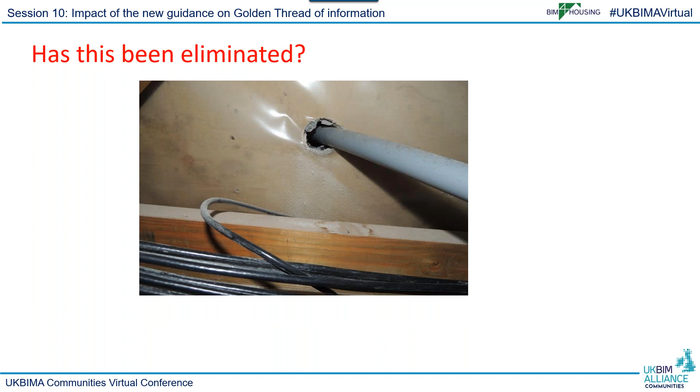And what we're now doing is producing safety case reviews to identify where those risks are. And yet, even if we've done fully coordinated models, we're still getting this sort of quality of workmanship that is undermining things. And even the new clerk of works, when they're appointed, can only pick up on things they can actually see. So one of the challenges, I think, is what Dame Judith was talking about.

A digital record, transforming things into digital rather than analog things that we can see and pick up through normal senses. And really, as far as housing associations are concerned, they've typically left the BIM side of things to the supply chain, but now they are involved.

And they're looking to help them reduce their risk from a legal perspective. So what has been happening is there's a whole range of different processes and methods by which risk can be identified and, probably more importantly, transferred.

And we've also got ways of looking at where the risks are in terms of information, and putting in place processes to identify what those steps are that can be taken to change things. And also the reports that are needed to ensure that we can actually occupy the building afterwards.

But really, what we're trying to do is improve that quality of information. And what Judith was talking about was using BIM to get us to a situation where we've got the same sort of traceability that we've got in aerospace and automotive.

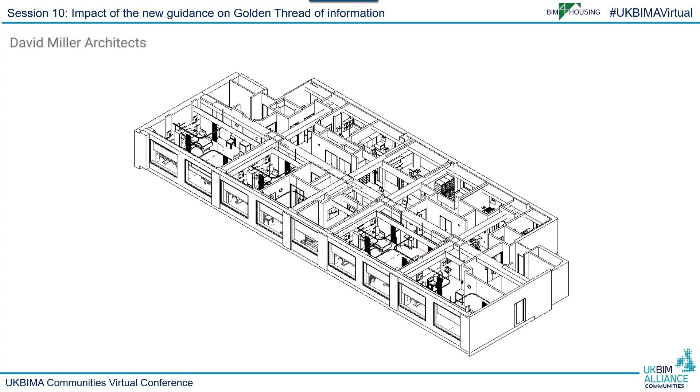So we've been working with David Miller over the last 3 or 4 years to try and look at how we can pull this golden thread process together. And here we've got a specification. This has come from NBS Create. And you'll see here, they're not using fire rating as a reference, they're using fire integrity and fire insulation. I'm sure that there are architects and engineers on this call who would explain to me what the differences are with that, but it's not simple.

And the other interesting thing with that is, although they've referenced 30 minutes there, they've now been advised that it's probably more sensible to take that 30 minutes out of the specification and just leave the reference to the British Standard. And therefore, the person that's trying to find out what the fire rating is of that door has to look at the fire strategy report and also the British Standard. So that may not be a good thing to do when you're in the middle of trying to sort something out in an emergency.

So we think it's better if we can explicitly say what information we need, and that's really what the asset information requirements are about. If we can explicitly say it, then we can automatically validate and check to see if that information has been provided. We can provide product manufacturers with that information as well, so they can ensure that they're providing the data that's needed. And then as it's coming into the project model, we can then automatically generate it through into the digital O&M. It's a matter of using standardization to achieve a lot of that.

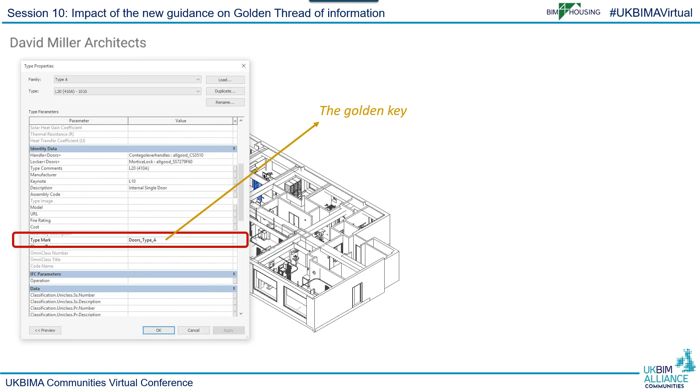So in this case, we've got a Revit model, and we've dropped into the Revit model a parameter. We're calling this the golden key. So this is the golden key to the golden thread. Basically, it's just a reference which then can go out to a schedule. And having that schedule, it means that we can generate, here's a COBie data set, and here we can then see that reference back to the object and also the product that is satisfying it.

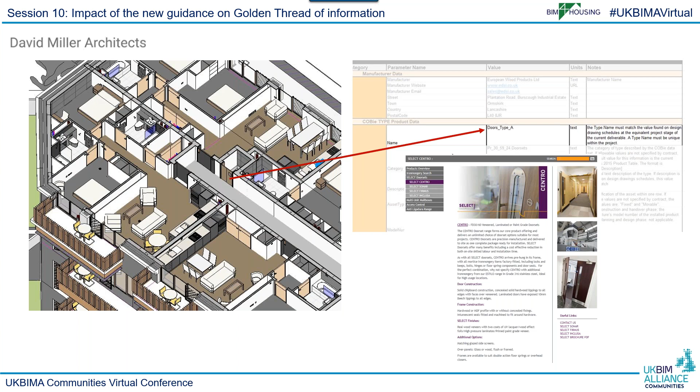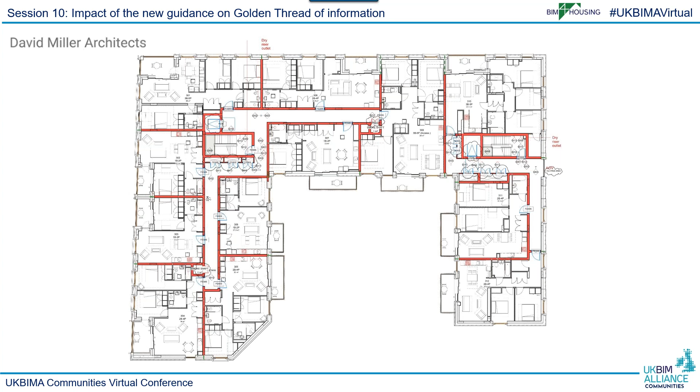By neutralizing that, not putting the manufacturer's information into the model, when that product might get swapped because of an issue during the warranty period or in due course during the life of the job, it can get swapped as well. You can then also reference it back to the fire strategy. So when type A becomes a type G because it's a fire door, or a type F because it's a mechanically controlled door, you're not having to change things in the model. You're simply referencing it to the right type of product.

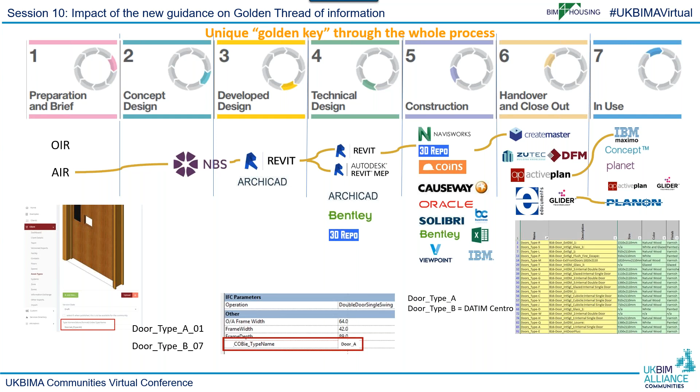And the manufacturer's information can then be kept up to date by the manufacturer. But we're not saying that that should be as a document. It might be as a document, but we need the key data to be held digitally. So the overall impact of that is that we've got the AIR going into the specification tool, connected to the objects in the models, and importantly, we're trying to tie this into procurement. So we're bringing procurement into the BIM process so that we can automatically capture the information as it's needed. And then we can grow that information through the overall process.

Also change management. So if we start at the beginning by tying the requirement to a product that can satisfy that requirement, we then feed that into the design process, and we can then feed that into procurement and the technical submittal process. And that then can go into delivery, installation and commissioning. So it's tying it in and adding value to the way the subcontractors need to work.

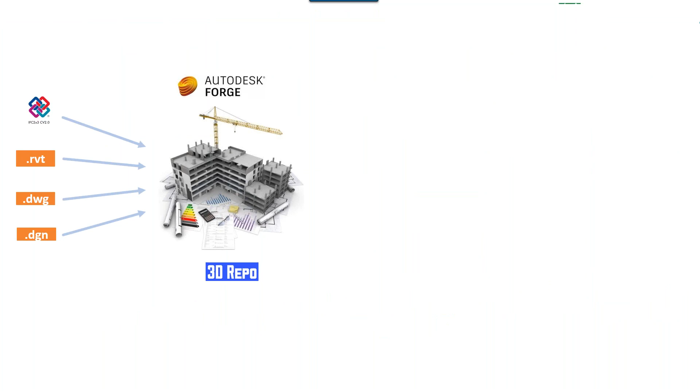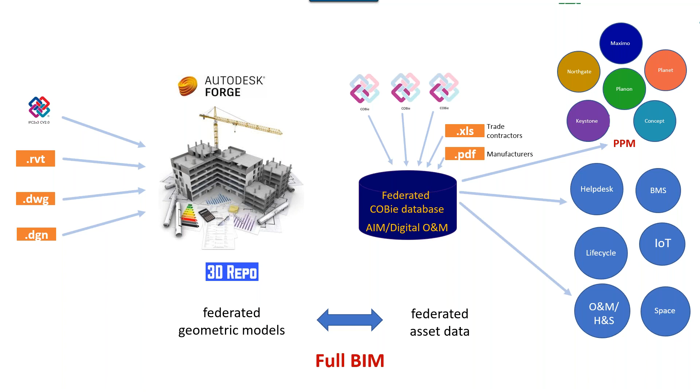So what we're doing really is doing the same with the data that we've been doing for years with the geometry. We're bringing together the data files into a federated database, and also providing trade contractors with simple tools to update their information as it becomes available. So we end up with a federated asset data set that automatically ties to the model. And therefore, once we've got all of that coordinated with the geometry and also the locations of items, we can then feed that out into whichever planned and preventative maintenance system is being used. But we can also have APIs into the various other data sets that are being used as well. So the idea is to create a complete network of data services.

So where are we now? Well, part of the issue really is to make sure that we've got standardized libraries and standardized data sets. And there's a lot of work going on by authorities to author the information so that we're all working and singing off the same hymn sheets.

So as far as the clients are concerned, what we're doing is providing a means by which they can hold that information in standard data templates and library items which they can either have as private or community libraries, which then are used on projects. So when they're then used on projects, they'll get glued together and can supply the information out to whichever systems are being used.

And how do we then capture that information? Well, if that's been specified, we can then feed that out into spreadsheets or online forms into a database so that the trade contractors know exactly what information they've got to provide. These are IFC configured data templates. So that information can then be captured in a form that makes it easy for them to work with.

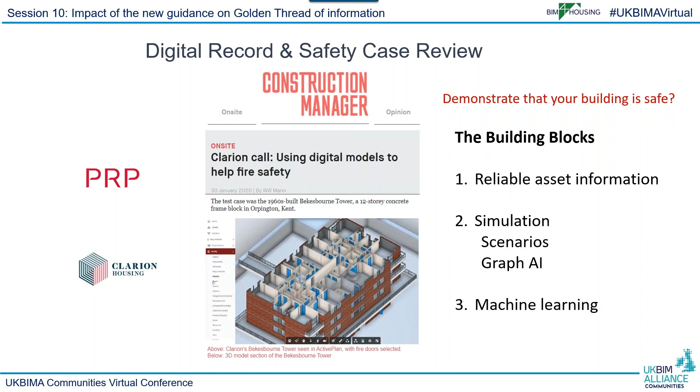But we also then need to probably run simulations to be able to run scenarios to see whether people can get out, and use machine learning to then support that. So these are some experiments that we've been doing with Graph to enable us to look at the interrelationships between spaces and the items that are protecting them.

So overall, I think it's about collaboration to be able to take libraries from major clients and also then create community libraries that everybody can share, and then use those on projects so everybody's singing off the same hymn sheet.

And finally, this is the way we're taking BIM for housing. We're creating virtual working groups around a number of different topic areas, and we've got a lead team on each of those now. This is just starting, but the principle is that we're going to identify problems that we're trying to solve, identify what the impact of those problems are, so that we can use that to prioritize which problems we're going to address.